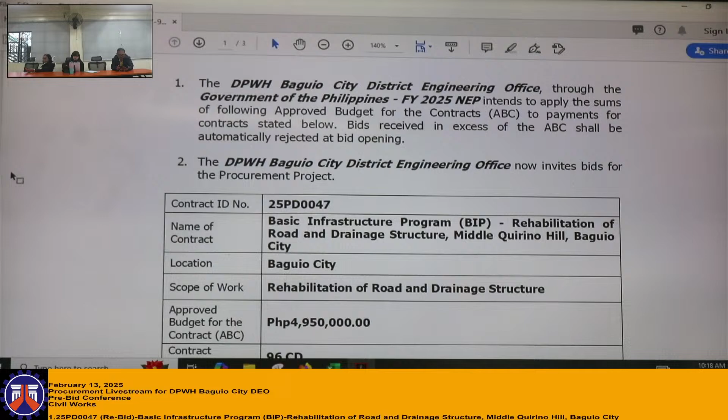The DPWH Baguio City District Engineering Office now invites bids for the procurement project. Contract ID 25PD0047, Basic Infrastructure Program, Rehabilitation of Road and Drainage Structure, Middle Quirino Hill, Baguio City. Scope of work: rehabilitation of road and drainage structure. The approved budget for the contract is 4,950,000. The contract duration is 96 calendar days. Cost of bid documents is 5,000 pesos.

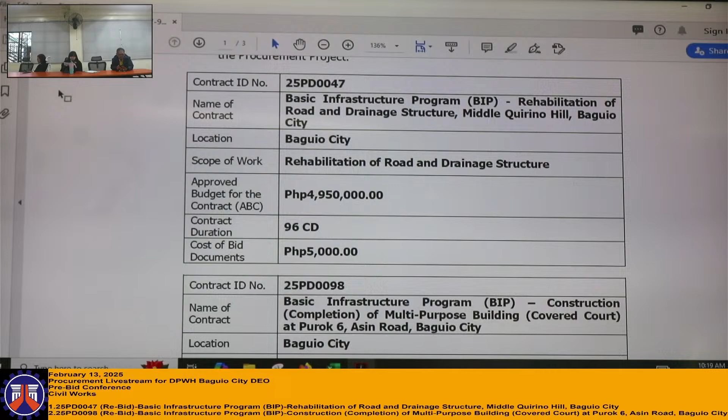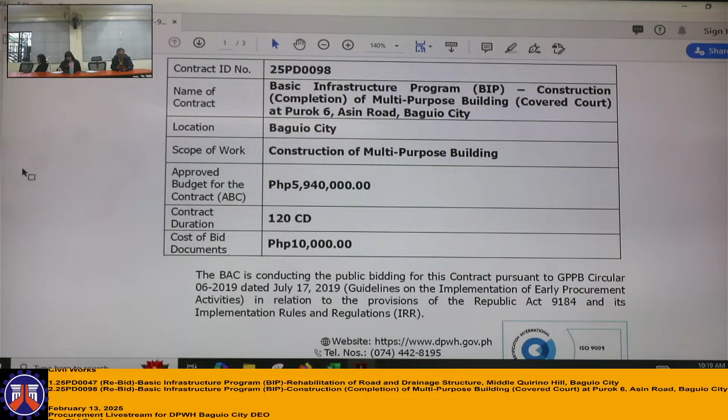Contract ID number 25PD0098, Basic Infrastructure Program, Construction, Completion of Multipurpose Building, Covered Court at Purok 6, Asin Road, Baguio City. Scope of work: construction of multipurpose building. The approved budget for the contract is 5,940,000. The contract duration is 120 calendar days. The cost of bid documents is 10,000.

The BAC activity is conducting the public bidding for this contract pursuant to GPPB Circular 06-2019 dated July 17, 2019, guidelines on the implementation of early procurement activities in relation to the provisions of Republic Act 9184 and its implementing rules and regulations.

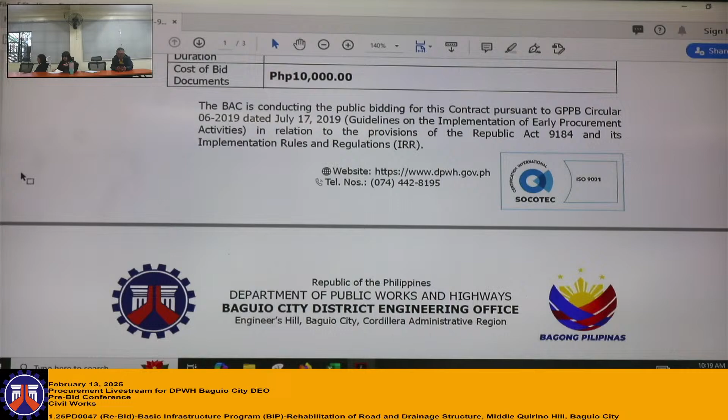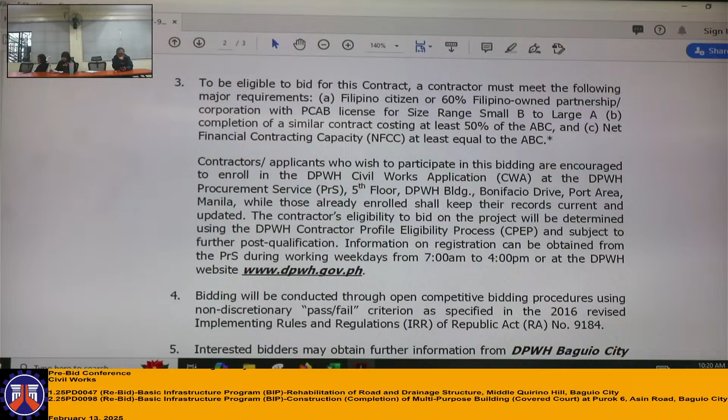To be eligible to bid for this contract, a contractor must meet the following major requirements: Filipino citizen or 60% Filipino-owned partnership or corporation with PCAB license for size range Small B to Large A, completion of a similar contract costing at least 50% of the ABC, and net financial contracting capacity at least equal to the ABC.

Contractors and applicants who wish to participate in this bidding are encouraged to enroll in the DPWH Civil Works application at the DPWH Procurement Service, 5th floor, DPWH Building, Bonifacio Drive, Port Area, Manila, while those already enrolled shall keep their records current and updated. The contractor's eligibility to bid on a project will be determined using the DPWH Contractor Profile Eligibility Process and subject to further post-qualification.

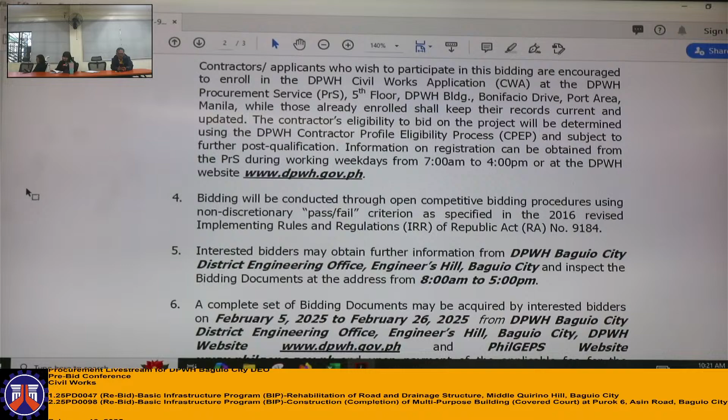Information on registration can be obtained from the PRS during working weekdays from 7 a.m. to 4 p.m., or the DPWH website www.dpwh.gov.ph. Bidding will be conducted through open competitive bidding procedures using non-discretionary pass-fail criterion as specified in the 2016 Revised Implementing Rules and Regulations of Republic Act 9184.

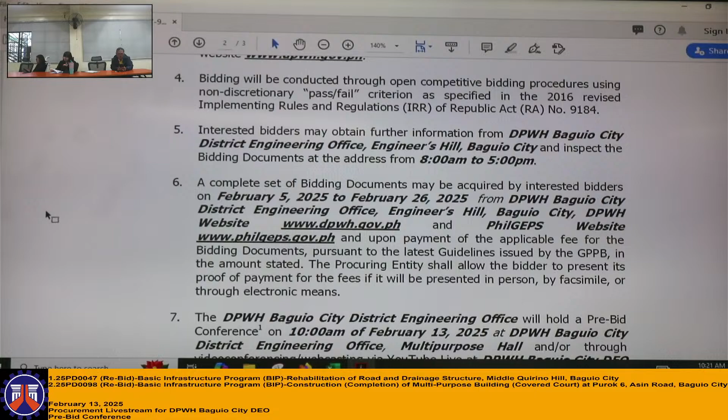Interested bidders may obtain further information from DPWH Baguio City District Engineering Office, Engineers Hill, Baguio City, and inspect the bidding documents at the address from 8 a.m. to 5 p.m. A complete set of bidding documents may be acquired by interested bidders from February 5, 2025 to February 26, 2025 from DPWH Baguio City District Engineering Office, Engineers Hill.

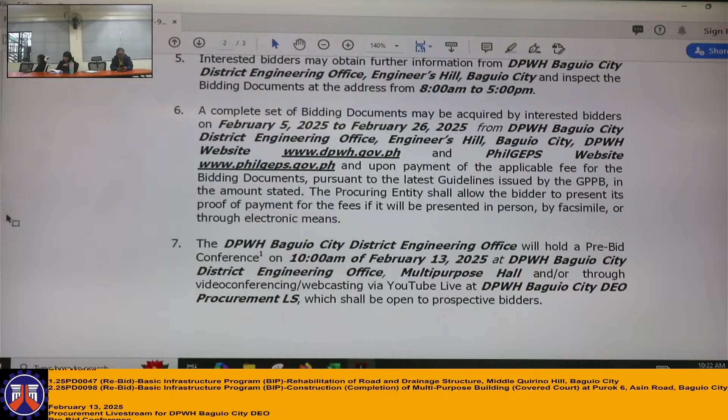Baguio City, DPWH website www.dpwh.gov.ph, and PhilGEPS website www.philgeps.gov.ph. And upon payment of the applicable fee for the bidding documents pursuant to the latest guidelines issued by the GPPB in the amount stated, the procuring entity shall allow the bidder to present its proof of payment for the fees if it will be presented in person, by facsimile, or through electronic means.

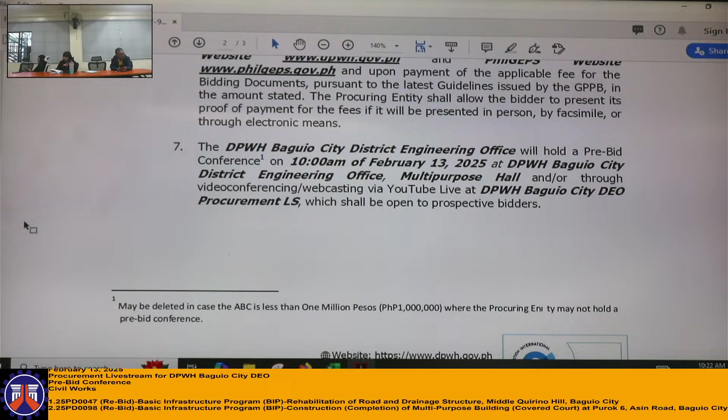The DPWH Baguio City District Engineering Office will hold a pre-bid conference at 10 a.m. of February 13, 2025 at DPWH Baguio City District Engineering Office Multipurpose Hall, and/or through video conferencing, webcasting via YouTube Live at DPWH Baguio City DEO Procurement LS, which shall be open to prospective bidders.

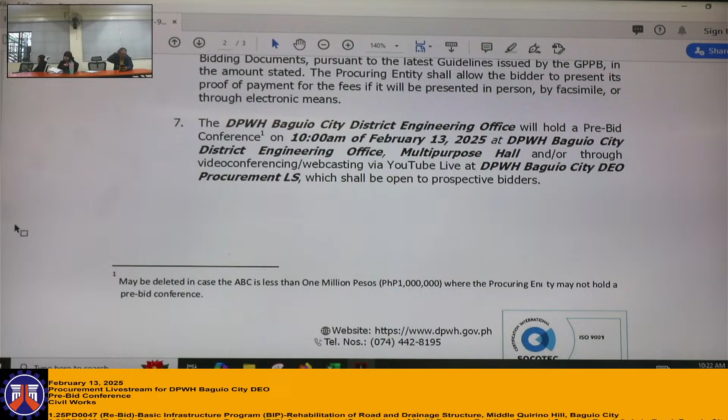Bids must be duly received by the BAC Secretariat through manual submission at the office address as indicated, or online/electronic submission at electronicbids_baguiocity@dpwh.gov.ph, or both, on or before 10 a.m. of February 26, 2025. Late bids shall not be accepted.

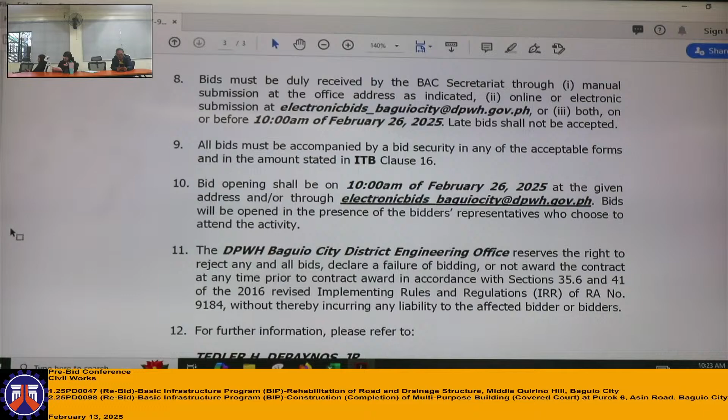All bids must be accompanied by a bid security in any of the acceptable forms and in the amount stated in ITB Clause 16. Bid opening shall be at 10 a.m. of February 26, 2025 at the given address and/or through electronicbids_baguiocity@dpwh.gov.ph. Bids will be opened in the presence of the bidders' representatives who choose to attend the activity.

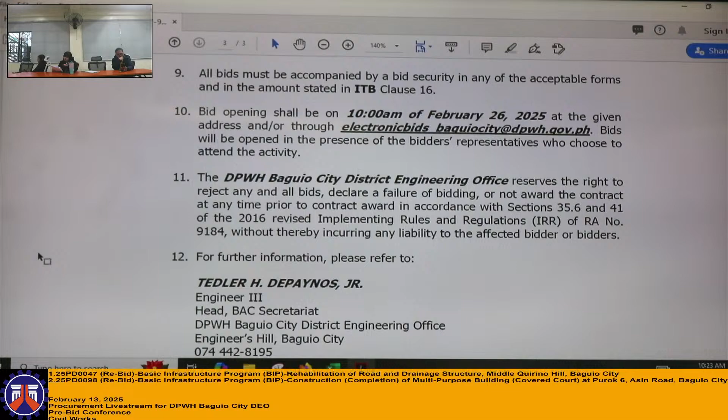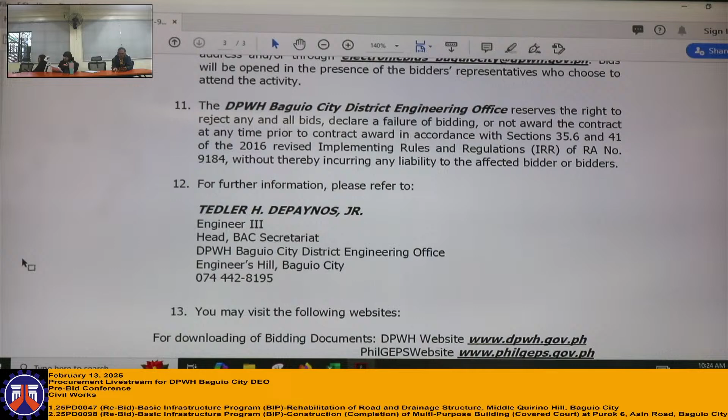The DPWH Baguio City District Engineering Office reserves the right to reject any and all bids, declare a failure of bidding, or not award the contract at any time prior to contract award, in accordance with Section 35.6 and 41 of the 2016 Revised Implementing Rules and Regulations of RA 9184, without thereby incurring any liability to the affected bidder or bidders. For further information, please refer to your screen.

You may visit the following website. Please refer to the screen, for contract ID number 25PD0047, to be presented and discussed by Engineer Leandro Delayas.

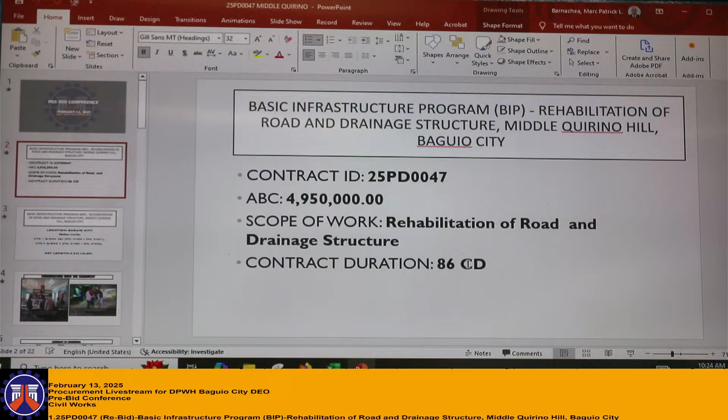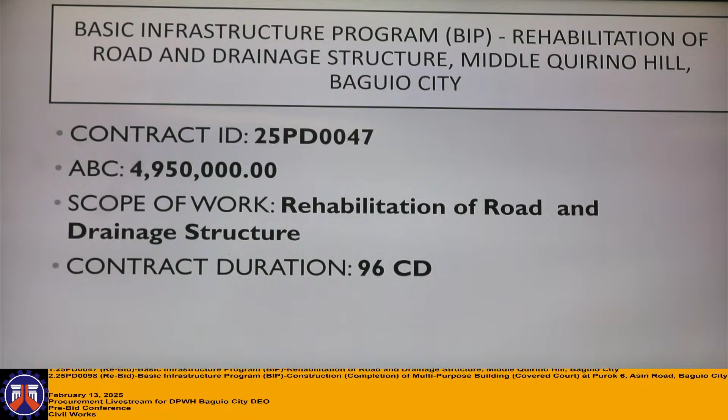Good morning po. I am Engineer Leandro Dalias from the construction section, and I will be presenting the proposed project titled Basic Infrastructure Program, Rehabilitation of Road and Drainage Structure, Middle Quirino Hill, Baguio City. It has an appropriation of 4,950,000, and the scope of work comprises rehabilitation of road and drainage structures, with a total contract duration of 96 calendar days.

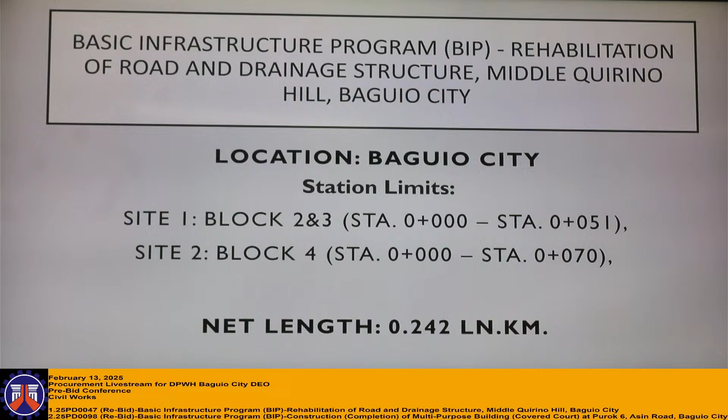For that project, we will be having two sites, both within Middle Quirino Hill. Site 1 will be at Block 2 and 3, starting from station 0 to station 51. Site 2 will be at Block 4, starting at station 0 to station 70, having a total length of 0.242 lane kilometers. We were able to coordinate with the barangay.

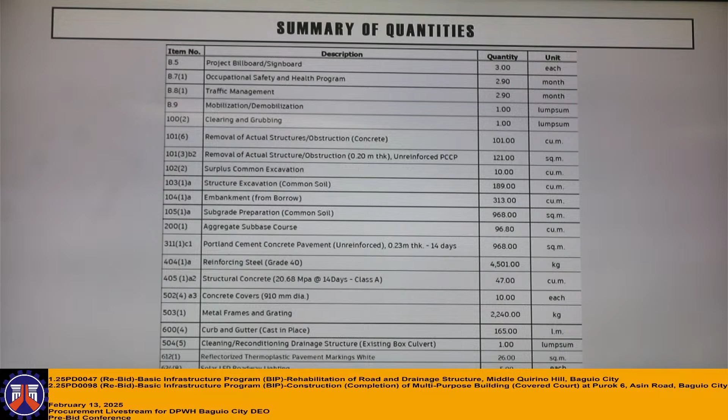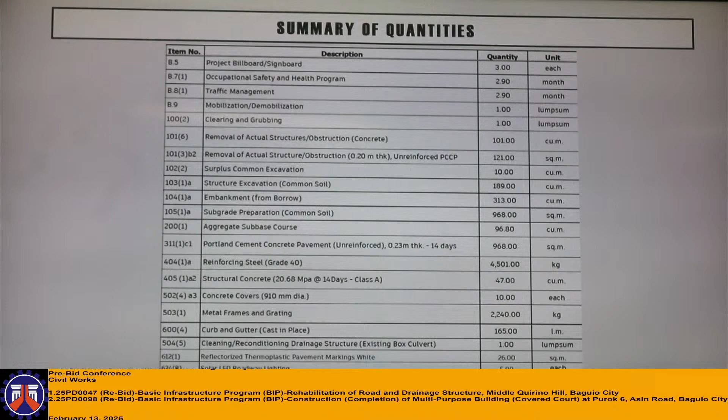Here we have the summary of the quantities: the project billboard, occupational safety and health program, traffic management, mobilization and demobilization, clearing and grubbing, removal of actual structures or obstructions for the box culverts, removal of actual structures for the PCCP, surplus common excavation, structure excavation, embankment, subgrade preparation, aggregate sub-base course, Portland cement concrete pavement, reinforcing steel and structural concrete for the box culverts and manholes, concrete covers, metal frames and gratings, curb and gutter.

We have cleaning and reconditioning of drainage structure. Then we have reflectorized thermoplastic pavement markings, and we have solar LED roadway lighting.

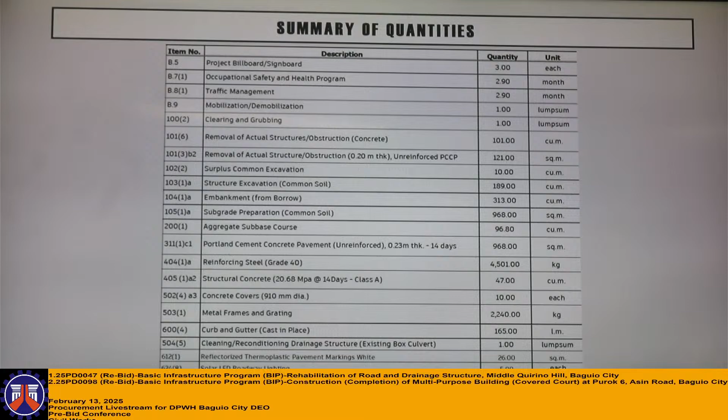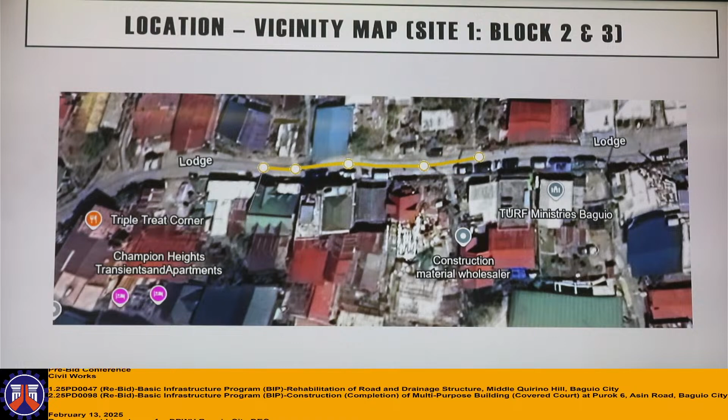Starting with Site 1, located between Block 2 and 3. This is the start and end of it. This is its SLD. Throughout the span of the 51 meters, we will have PCCP.

At Station 26 until Station 51, we will be having curb and gutter at both sides of the road. Then in Block 2 and 3, there will be two solar lights installed, which are the two black circles there.

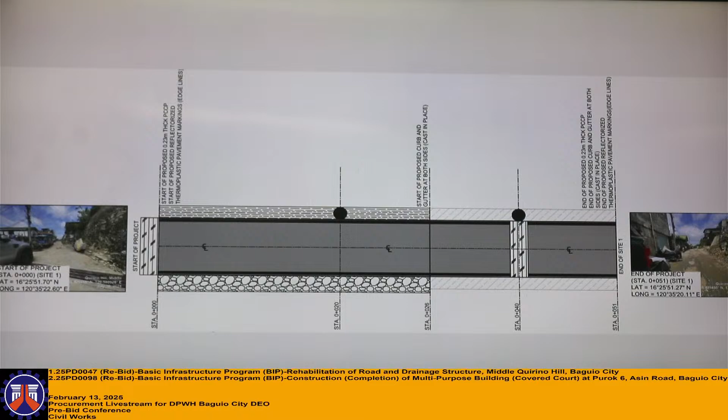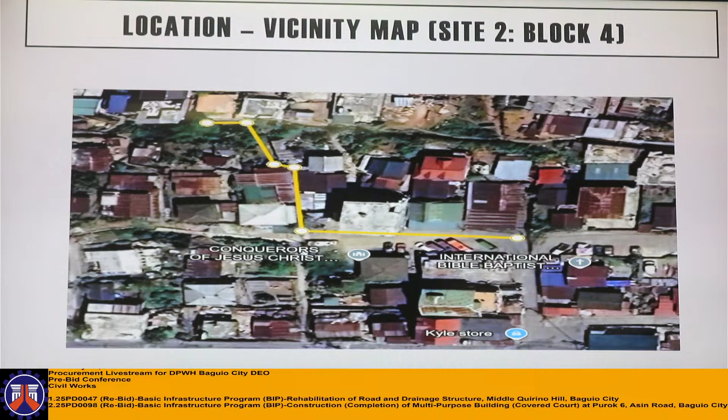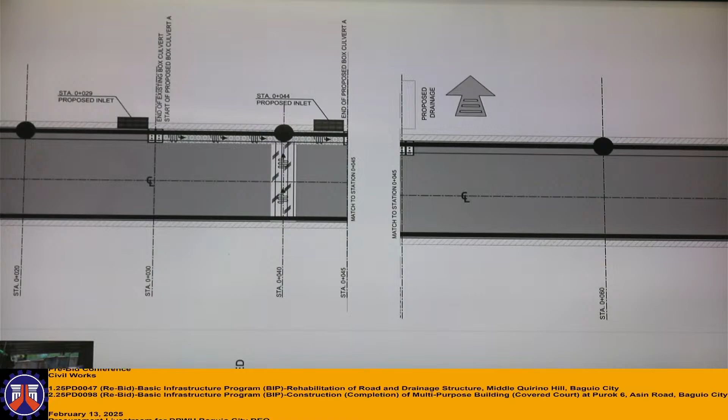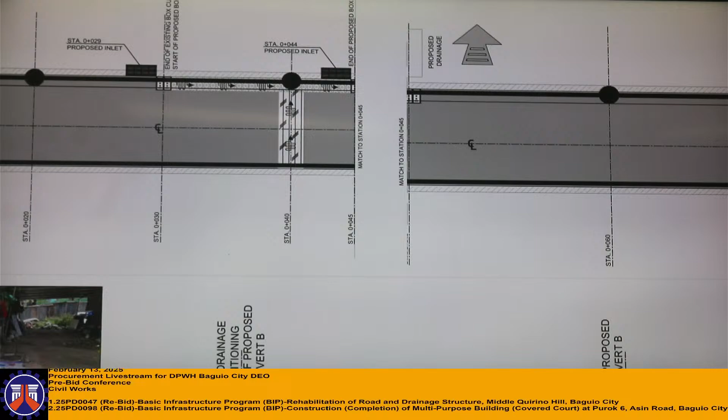Along with the PCCP, from Station 30 to Station 45, we will have a proposed box culvert with manholes and inlets.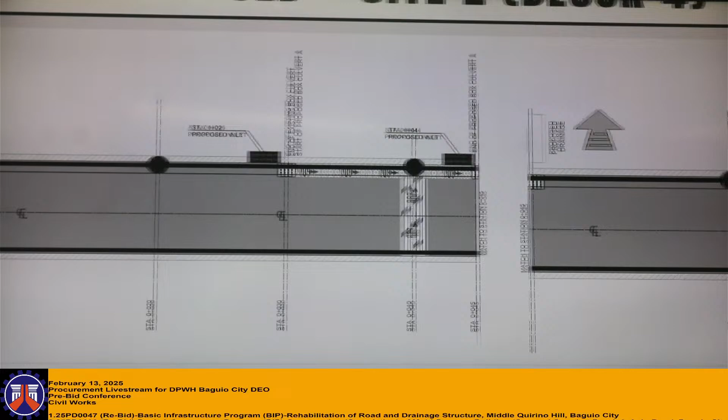Over here at Station 45, there is a proposed drainage going perpendicular to our proposed road. In Block 2, this is the proposed drainage.

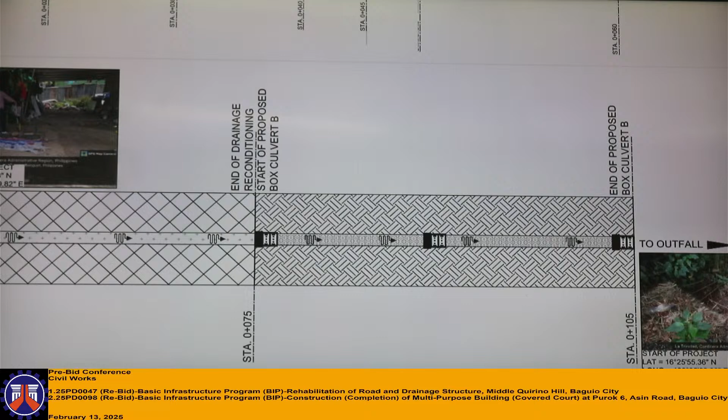We have 30 meters of cleaning of existing drainage, and an additional 30 meters of proposed box culvert. Our box culvert has two different designs.

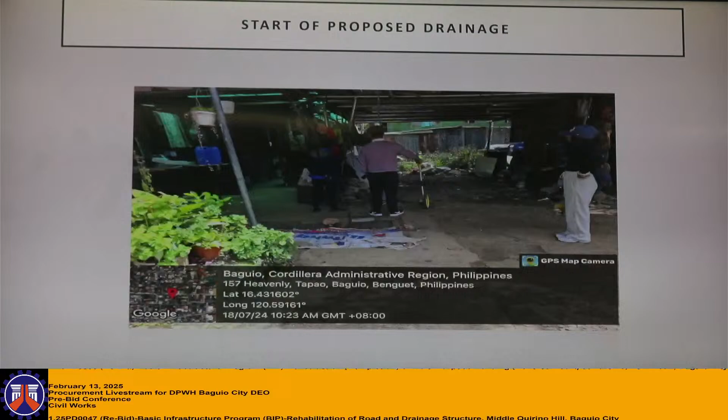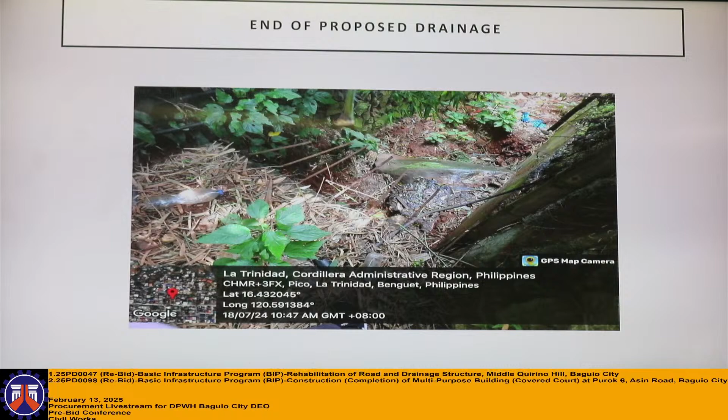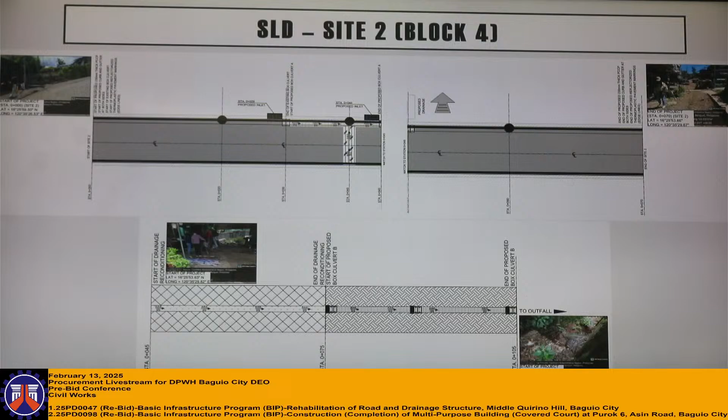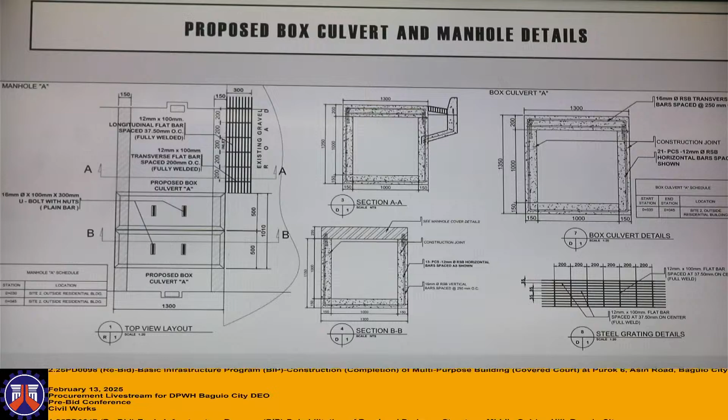Moving on, back to the details. This is the details of our first box culvert to the manholes, and this is the second box culvert going to the outfall.

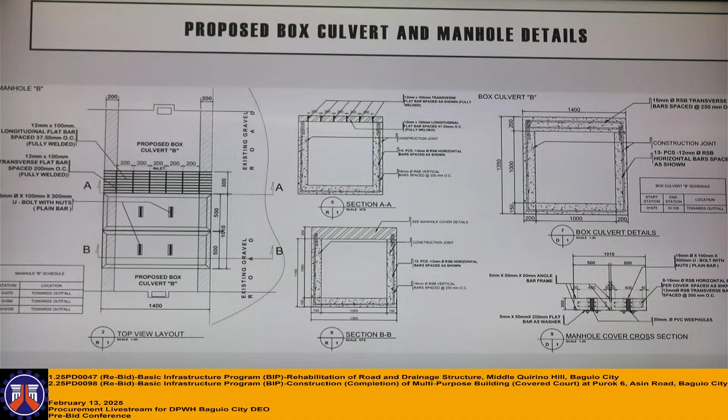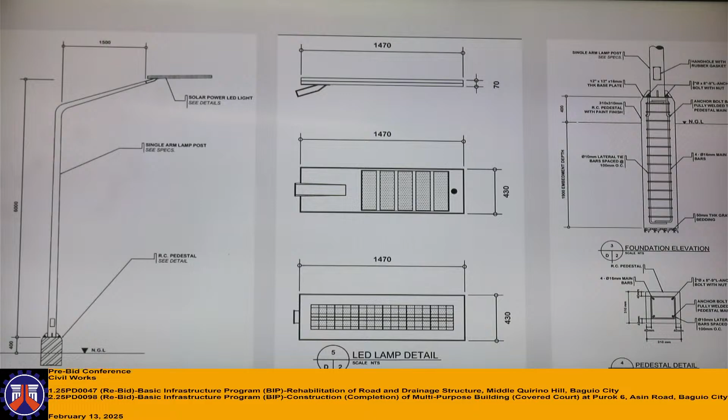Any questions? Sir, reaction?

Contract ID number 25PD0098, to be discussed and presented by Architect Rene Ann Caliten.

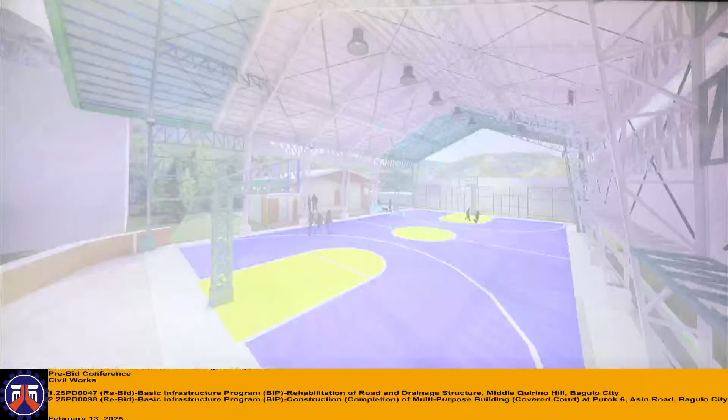Good morning po once again. I will present CY 2025 Project Basic Infrastructure Program: Construction Completion of Multi-Purpose Building Covered Court at Purok 6, Asin Road, Baguio City.

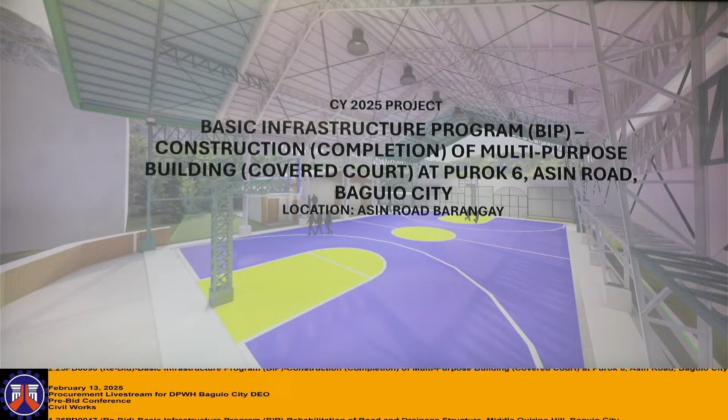Location is at Asin Road, Barangay. Project ID 25PD0098. ABC is 5,940,000. Calendar days is 120.

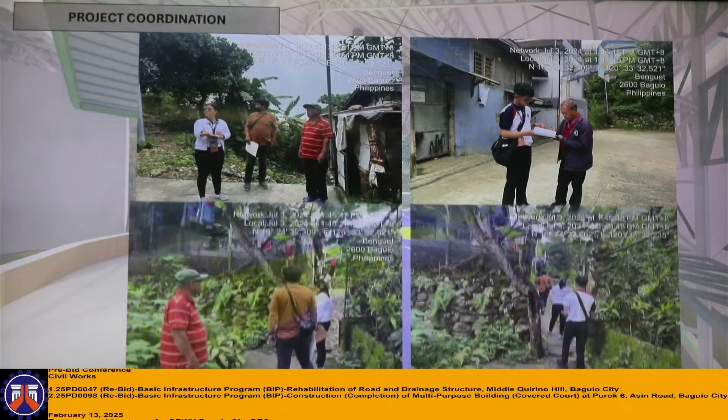Project location, project coordination certifications, project coordination photos, the scope of work - madadagdagan lang po ng 3 spans yung covered court.

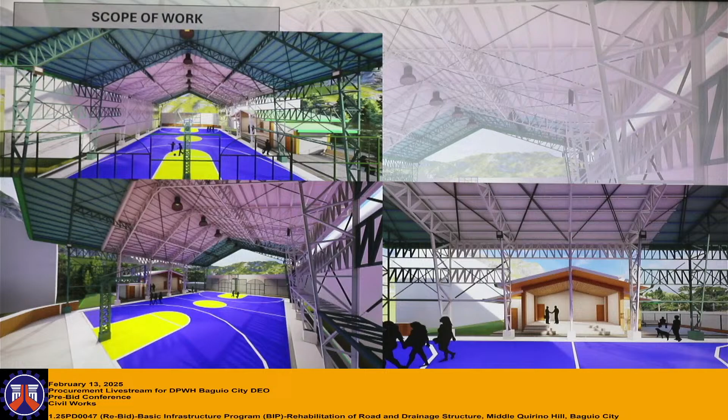May construction din po ng stage at basically completion lang po siya ng covered court. Malalagyan din po siya ng fences, covered court rings, at yung slab ng flooring.

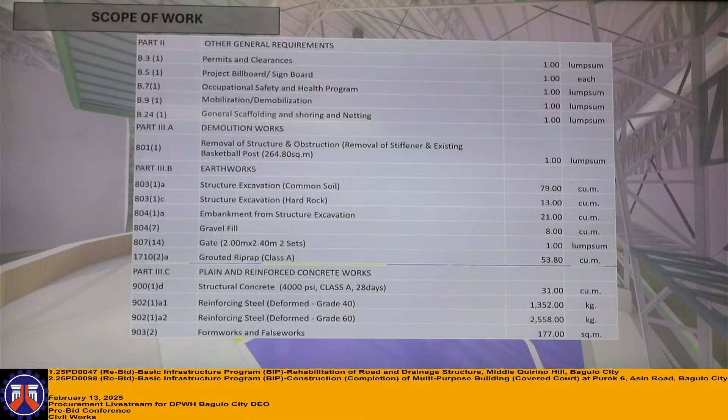So the scope of work: removal of structure, structural excavation, gravel fill, gate, grouted riprap class A.

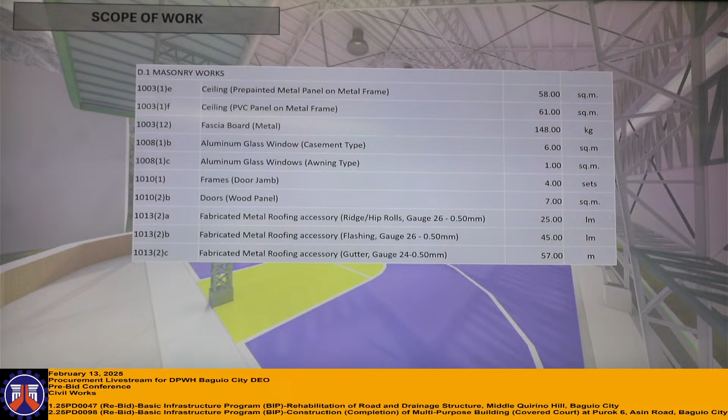For the masonry works: ceiling, pre-painted metal panel on metal frame, ceiling PVC on metal frame, fascia board, aluminum glass casement type, awning type, doors wood panels, and fabrication of roofing - ridge roll, flashing, gutter, and pre-painted metal sheet rib type long span 0.50 mm thick.

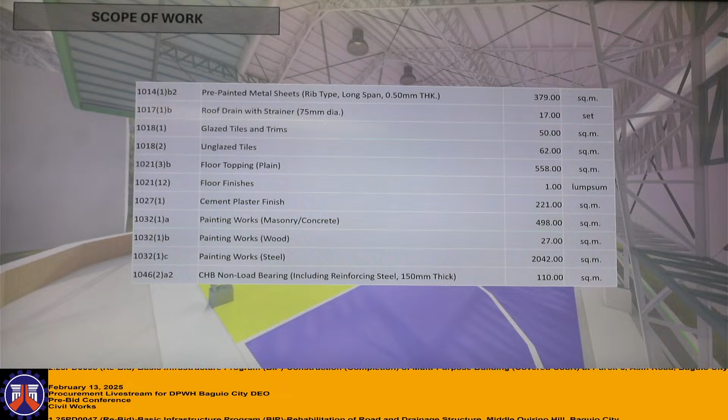Roof drain, tiles, flooring finishes, cement plasters, painting works for masonry and wood and steels, and CHB non-load bearing.

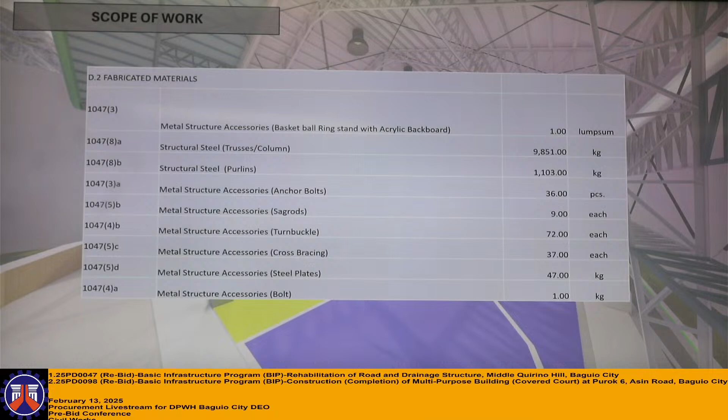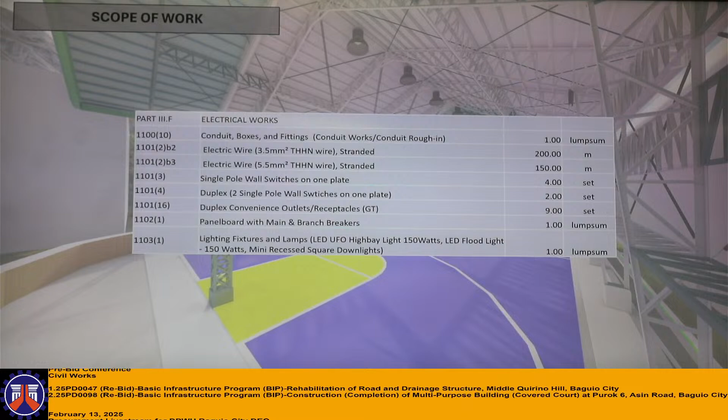For the structural steels, plumbing works, included dito po ang septic vault and the fence. For electrical works: lighting fixtures and lamps, LED UFO high bay light 150 watts, LED floodlight 150 watts, and mini recess square downlight.

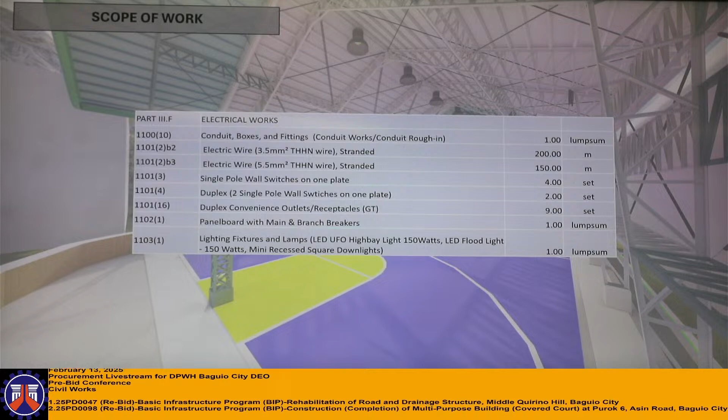Ito po yung covered court plan. Yun nga po yung sinabi ko earlier na madadagdagan lang po siya ng 3 spans. Yung may highlight po, may dotted lines pong red, yun po yung spans na madadagdag.

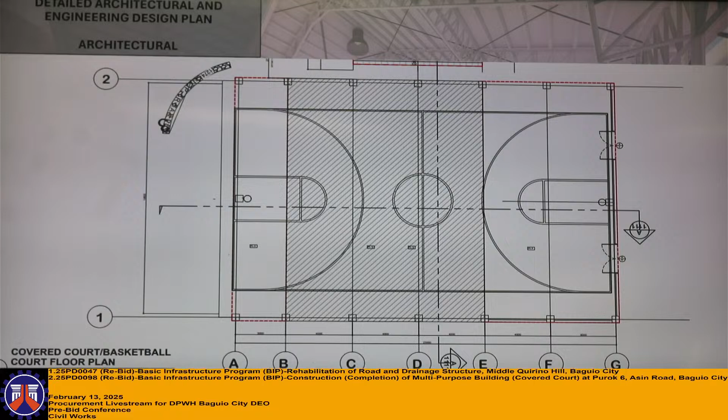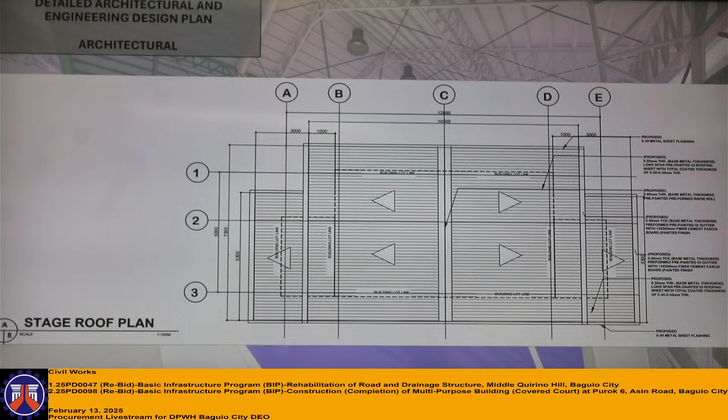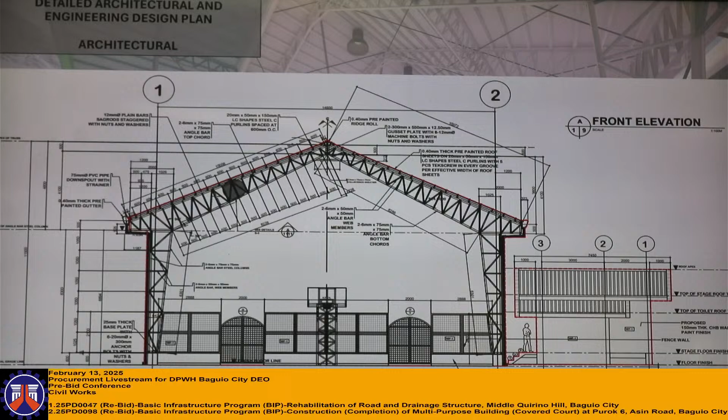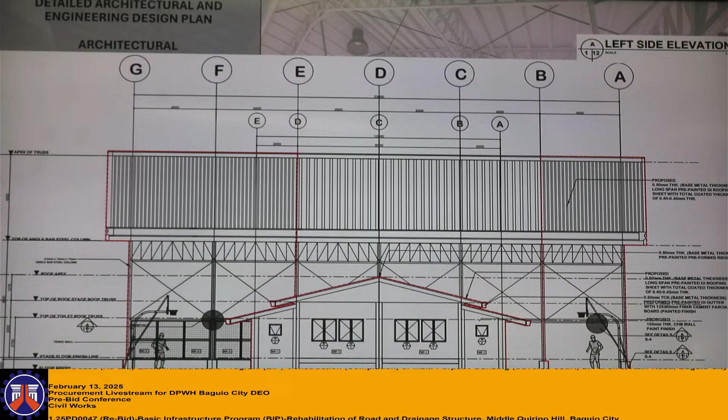Pati yung proposed fence tsaka yung ring. Ganun din po sa rear elevation, right elevation, left side elevation, covered court longitudinal section, and crossed section.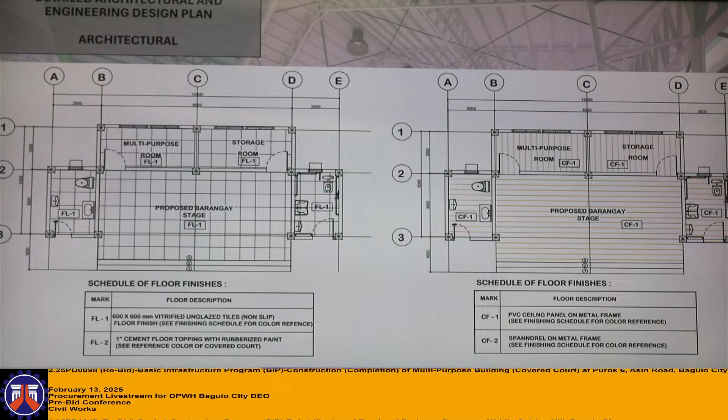For the flooring, 600mm by 600mm unglazed tiles. For the ceiling, PVC panel and spandrel metal furring. Ito po yung details ng ceiling details. Ito po yung finishing schedules niya.

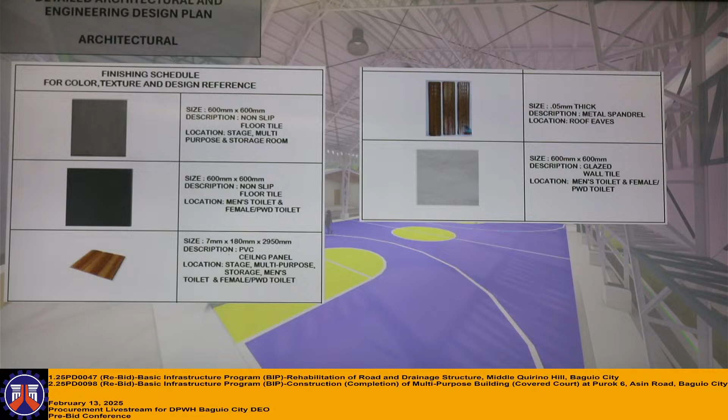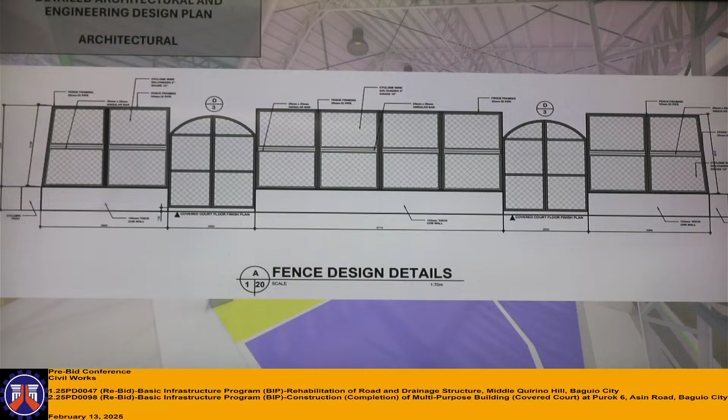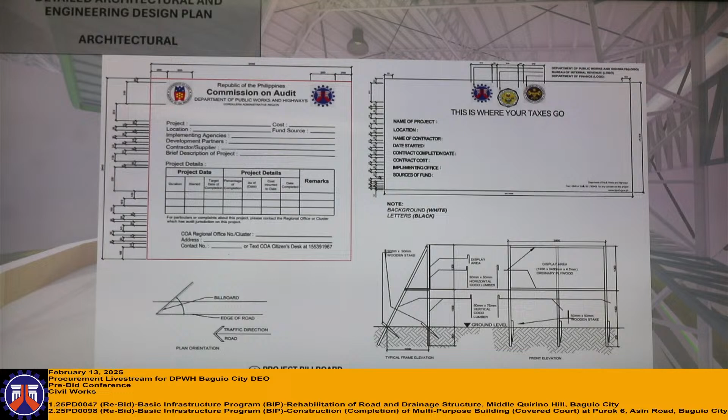Ito po yung fence details. Ito po yung gate design details. May footing po yung ating gate. Project billboard. Ito po yung first structural plan.

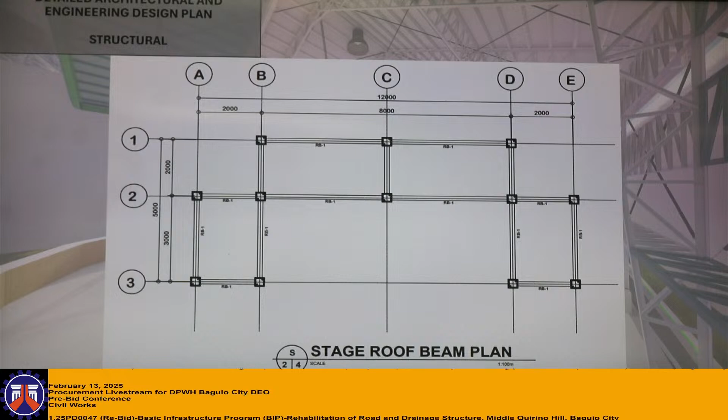Framing plan, roof framing plan, stage foundation plan, stage roof beam plan, stage roof framing plan, column details, F1 C1 footing details, and F2 C2 footing details.

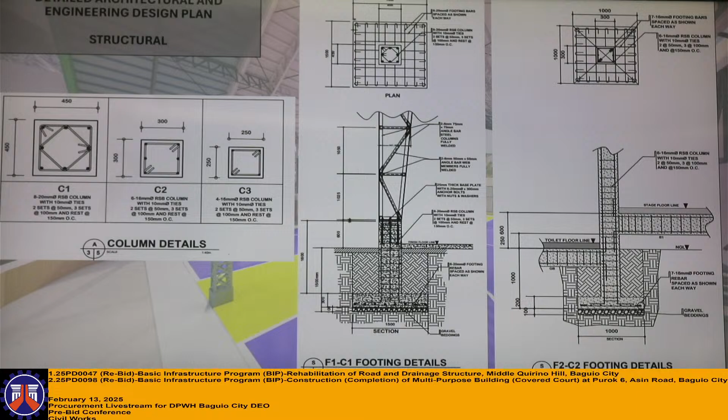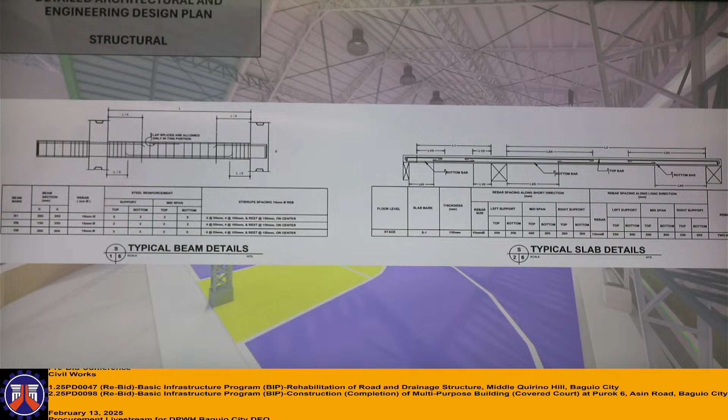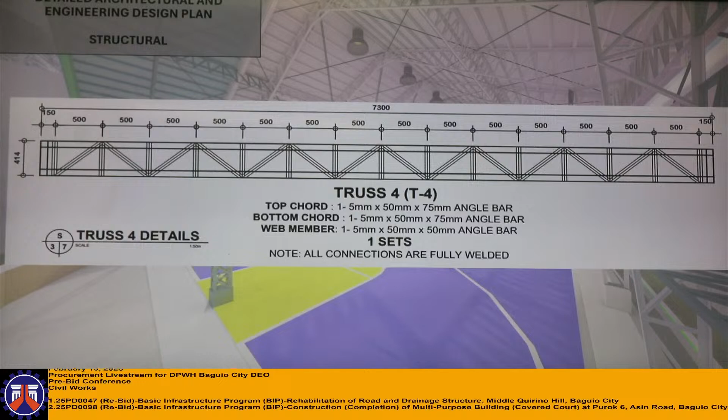Base plate details ng ating pedestal for the covered court, typical beam details, typical slab details, yung truss details para sa ating covered court, stiffener details, truss details para sa ating stage.

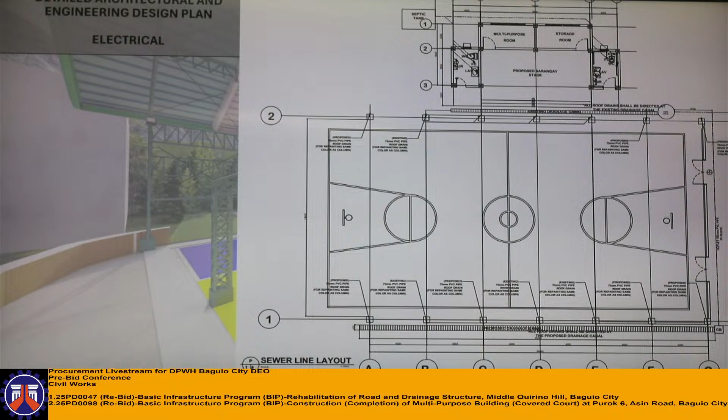Water line para sa ating stage. Sewer line, madadagdagan din po tayo ng may propose tayong drainage canal dito sa side. And septic details. That's it for my presentation. Any questions?